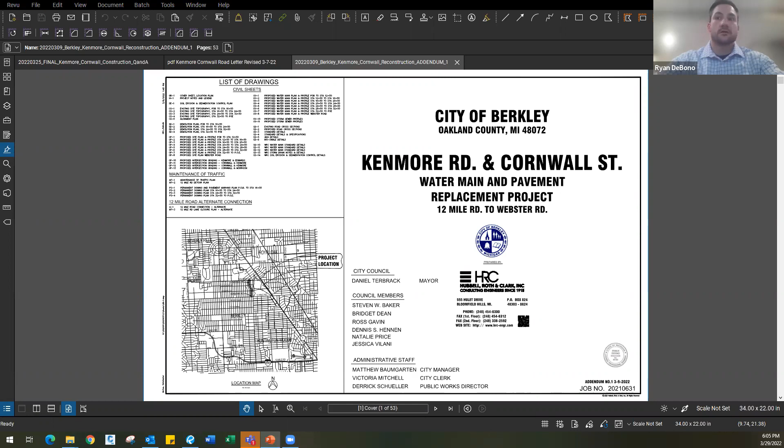Thank you, Tori. If we want to just jump back to that other slide real quick. Yep. I apologize. That's all right. Lost my screen share here. So we see you, Ryan, now. Yep, give me one second. I apologize. That's all right. There we go. Thank you, Ryan.

The first item that will be done is the new water main. We are putting in a new 8-inch water main through the entire route. We're also putting in new drainage structures, all new sidewalks, all new drive approaches, and we are incorporating a green infrastructure component that will help with our combined sewer system.

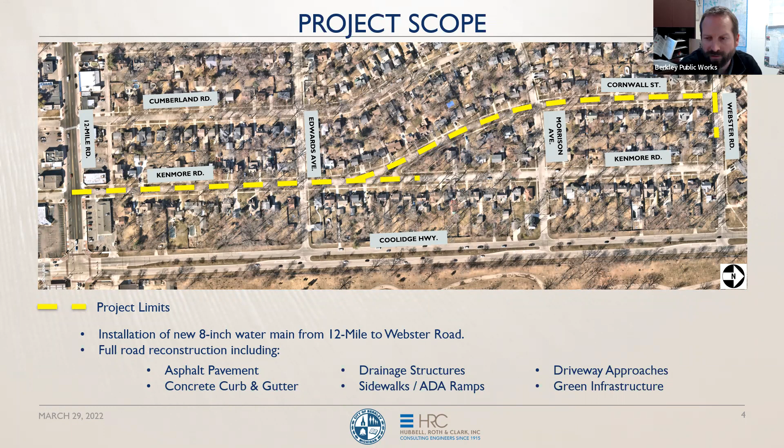So the goals, in looking at this project, we had several goals in mind. As many of you know, the reason that Kenmore and Cornwall was selected is because it rose to the top when we looked at the water main and road surface. When we combine those ratings, this particular section of roadway rose to the top. We've had the most water main breaks here over the last 5 years. So of the 6 areas that went to the top of the list, Kenmore and Cornwall rose to the top because of the number of water main breaks. So that was key for us in determining that this would be where we headed next.

Again, we're upgrading driveways, sidewalks, all the drainage structures. We do have that green infrastructure improvement that we're happy about, the rain garden there at the corner, which will reduce stormwater runoff. Another goal was to increase the amount of pervious surface. Impervious surfaces like pavement obviously lead to more runoff and more water in our combined sewer system. So we wanted to do what we could to create as much green space and preserve the trees as we could. Trees are also responsible for taking in an incredible amount of water, and so that's also important to us.

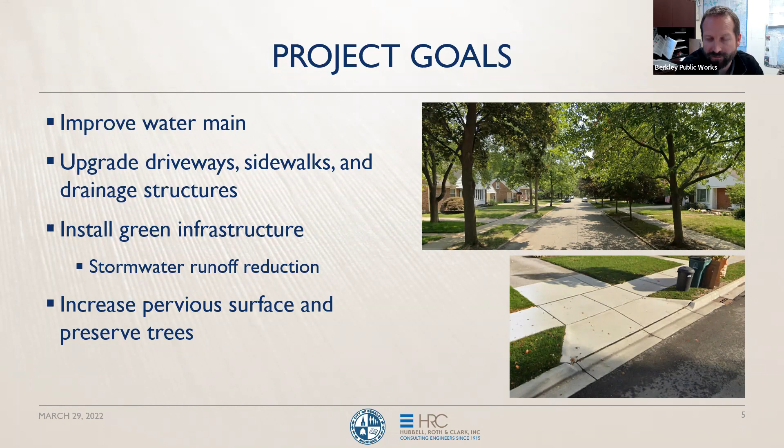Ryan, I think this is my transition to you. Ryan, you're on mute. Man, it's like I'm a rookie on this. You're fine. All right, thanks, Derek.

Again, my name is Ryan DeBono. I was the project engineer on the job. Some of you probably recognize me from the first meeting, so hopefully we're not too repetitive, but it's a lot of the same information. We're presenting it in a little different way here.

So as Derek mentioned, the main purpose of the project is replacement of a 6-inch water main that runs all the way from 12 Mile to Webster Road. We will be replacing that with a new 8-inch water main, all ductile iron. And with that comes all new service lines to every house, running from the main in the road to the stop box at the right-of-way line. We will also be replacing any lead service lines encountered, from the road all the way to the resident's water meter. So if anybody's aware of a lead service line in their house, please let the city know so we can make sure it's accounted for when we start construction. The full replacement of the lead line is paid for by the city, so there would be no responsibilities to the residents in that case.

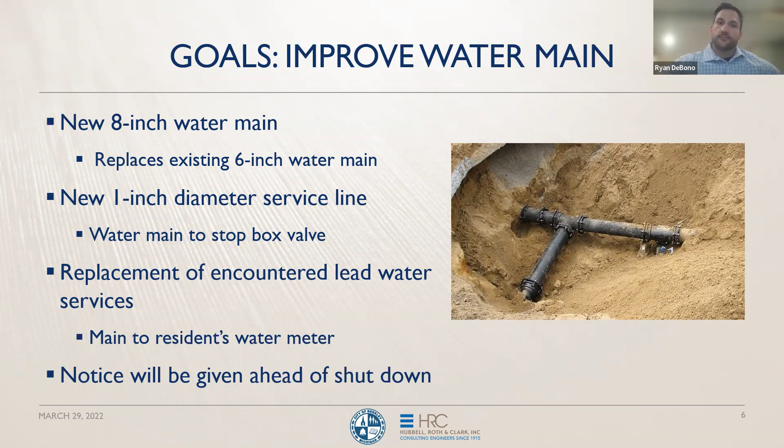So with new water main also comes new driveways, sidewalks, roadway and drainage structures. As part of the project, essentially from sidewalk to sidewalk across the road will all be replaced with new asphalt, new concrete drive approaches, 6 inches of concrete, all new sidewalk and ADA ramps. Again, it's a very intrusive process, but we mitigate the best we can. We give plenty of notice for when your driveways will be replaced, because when the new concrete's poured, we typically like to give 7 days for it to fully cure before we give access to it again. So we'll work with the city in providing temporary parking passes for overnight on adjacent streets and down out of the construction zone on Kenmore and Cornwall.

We'll also be providing new drainage structures along the whole route. We're adding a few more than what's there currently to try to help with some drainage issues that we've discovered, and try to mitigate any sort of ponding in the roadways.

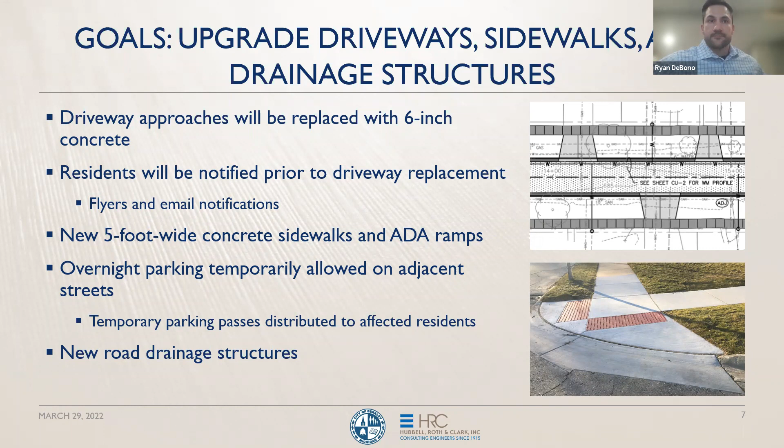So as Derek touched on earlier, at the fork in Kenmore and Cornwall, we are installing some new green infrastructure. It's referred to as a bioswale, so it would be a variety of different plants and flowers that are water-loving plants. This area acts as a small detention area where all the localized runoff flows in, and it's slowly filtered down through the plants, the soil and the planting mixture that we use. It helps alleviate that initial runoff from going directly into the sewer system. It also filters the stormwater, and then it goes into an underdrain located down the center of the bioswale and back out into the sewer system.

All the disturbed lawn areas will be replaced with 4 inches of topsoil and sod. And again, it's the contractor's responsibility to provide the first 14 days of watering, and then it would be transferred to the resident for their section of lawn.

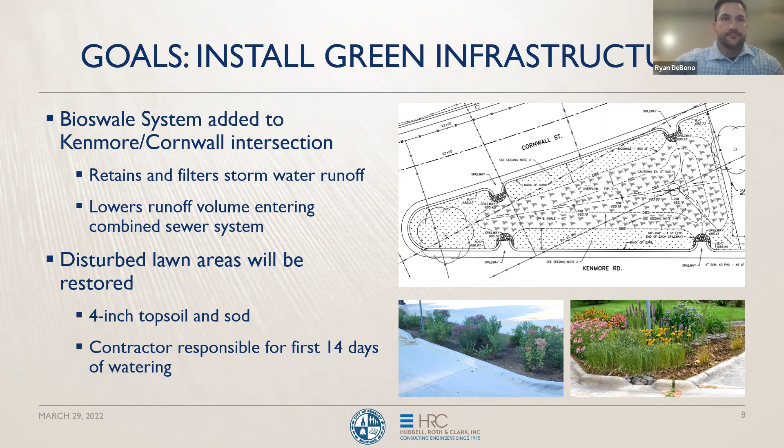So although our total road section is getting a little narrower, we're also providing a full 6-inch curb through the whole project, which isn't there currently. Through the years, there's been overlays on the road, and that takes away from the exposed curb height. So I think the average on this job now is like 3 inches. So when that's all replaced, we'll have a full 6-inch curb height, and we'll have a full curb and gutter

section there to encourage the stormwater to be stored in the gutter temporarily. We want to kind of store the water on the road before overwhelming the sewer system. So that helps decrease the first flush and the initial rush of water down the catch basins and into the sewer system, which will give the system time to drain and reduce the likelihood of any sort of backups in the sewers.

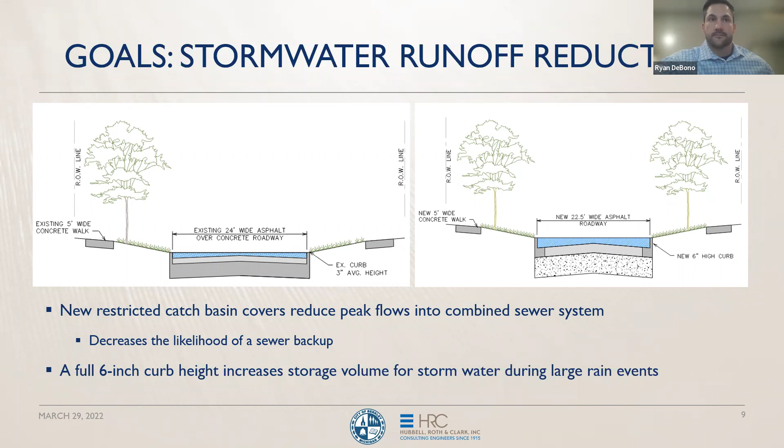Also, one of the main goals of this project, Derek touched on too, is to preserve all the mature trees. And I don't need to run down every single benefit that trees have, but we highlighted a few of them here. We have 90 trees in the project area, and a lot of those are mature tall trees, and we've set up our design to try to preserve any and all of them. And the mature trees obviously will provide a benefit in your cooling costs in the summertime by the shade.

They absorb groundwater, stormwater, and there's a lot of volume of water that's held on the leaves of the trees as well during heavy rain events. So all those benefits help in preventing the stormwater from overwhelming the sewer, and it's all mitigating risk of potential water in basements.

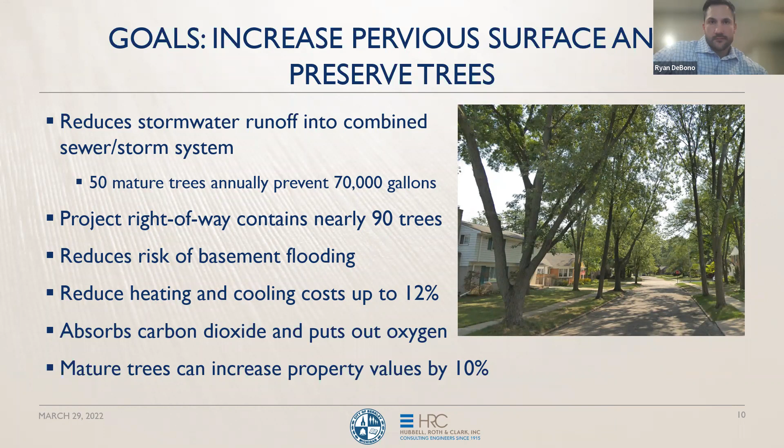And obviously, I've touched on these already, but with more impervious surface such as pavement, sidewalks, driveways, things like that, that gives you less opportunity for infiltration, which means more water gets into the sewer faster, which increases the risk again for potential flooding during very heavy rainstorms, or the first flush of oils and greases on the road that's washed into the rivers and the lakes, which obviously is not the case in this one since it's a combined system, but it's just overall not great for the environment. We want to encourage the stormwater to absorb into the ground and the grass and less in the sewer.

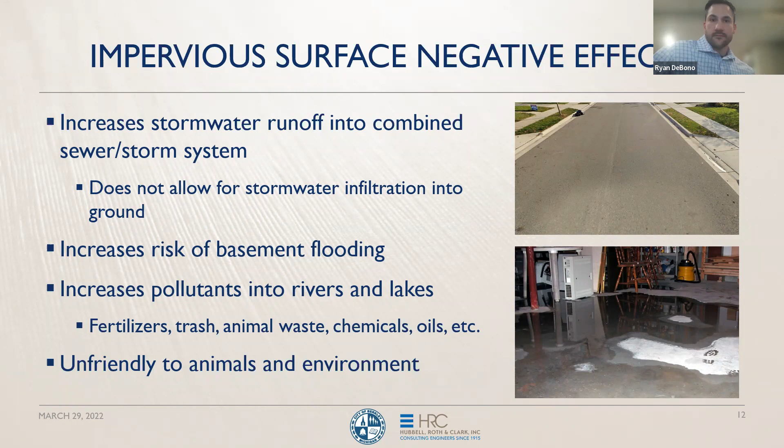So touching on this, the sanitary sewer leads: every resident has a sewer lead that connects to the main out in the street. And this has been on plenty of homeowner notices already. It should be pretty repetitive at this point, but we want to encourage all the residents to have their sewers inspected if they believe that they're not functioning properly. That could be having a licensed plumber come out, and they can videotape the lines. A lot of times there's roots, or sometimes there's breaks or offsetting joints in the pipes, and that could potentially lead to your basement flooding as well.

So residents are strongly encouraged to do that prior to construction, because it's better to fix it now before we put a brand new road in, because that'd be the cheapest time to do it. And we'd also encourage a backwater valve to be placed in the basement as well; that's always an option, to have a second measure of protection against a sewer backup. And again, those have been handed out on the homeowner notices, and we've had several residents that have already had theirs inspected, and there's been some problems discovered. So thank you to everybody who has, and it's better to get that taken care of in the next few weeks before construction begins.

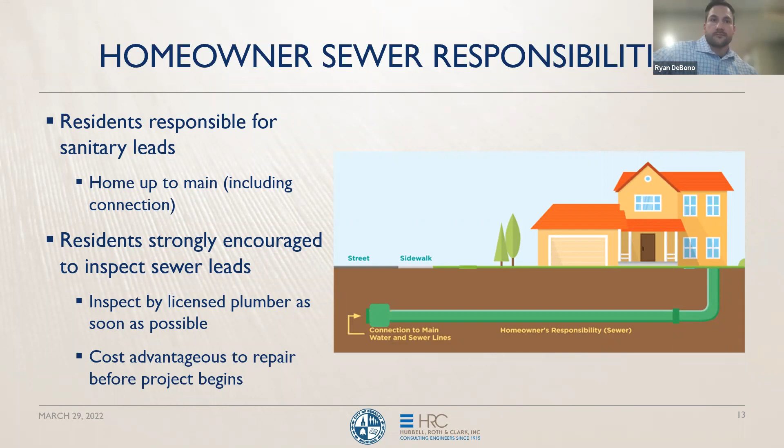Now I'm going to hand it over to Nick Nacita to take over from the project traffic perspective and the public safety, and how we came to our decisions for the parking standards and the fire lanes and all that fun stuff. So take it away, Nick.

Thank you, Ryan. Good evening, everyone. Thank you again for attending the town hall discussion. We really appreciate your interest in the project. My name is Nick Nacita. I work for Hubbell, Roth & Clark, and we've been working with the city and public safety as a collaborative effort to mitigate some of the conflicts that public safety is facing on navigating through the city.

Some of the project considerations here: multiple things were considered when designing for the reconstruction of Kenmore and Cornwall. My portion focuses on the public safety aspect of it. And then Ryan will further discuss saving the trees and some of the concerns with the driveway, so he's going to show that there is adequate driveway access. And then some of our findings from roads with similar operations we're excited to share with you, and also examine some of the existing conditions and focus on if we were not to do anything at all. Next slide.

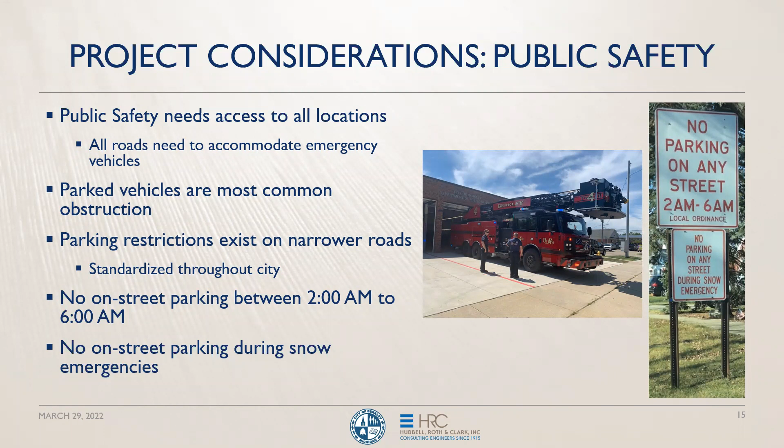So the two main variables that we were considering to mitigate some of the obstructions that public safety faces on the roadway: we looked at the existing roadway widths and also the vehicle widths that need to access these roads. So we reviewed the entire network and we found that the roads pretty much range between 22 feet to 28 feet. One common term that you're going to hear tonight is clear roadway width. So I just wanted to break down what that term means. That's basically the measurement from the face of curb to the face of curb. So you can see from that picture at the bottom, that is taking the measurement from just right inside the face of that curb all the way across the street to the other side of the curb.

So we're looking at that distance just because typically when you park your vehicle, on the passenger side, so the right side of the vehicle, you pretty much hug the face of that curb, unless maybe you have a teenager at home and maybe they park on the curb or on the grass. But generally speaking, for on-street parking, your passenger side is right up against that face of curb. And so we're trying to measure that distance to consider how many vehicles can be parked on the street and still allow for an emergency vehicle to pass.

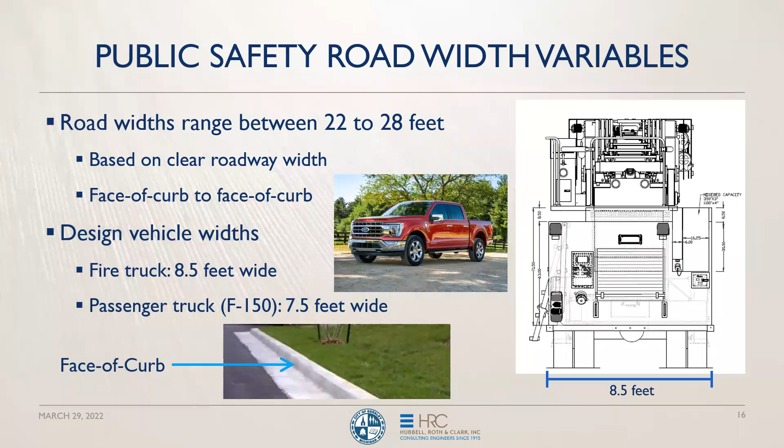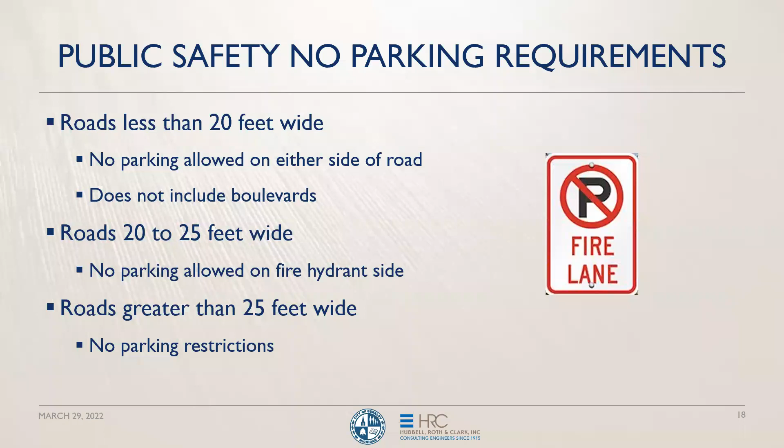And then with that, again, thank you everyone for your time. Hopefully that clarified some of the no parking concerns that we were hearing from the residents from the previous town hall meeting. And we'll be around after the presentation for some Q&A to answer any other questions or concerns that you may have. And with that, I will transition it back to Ryan to further discuss some of the other considerations that we had when designing for the reconstruction.

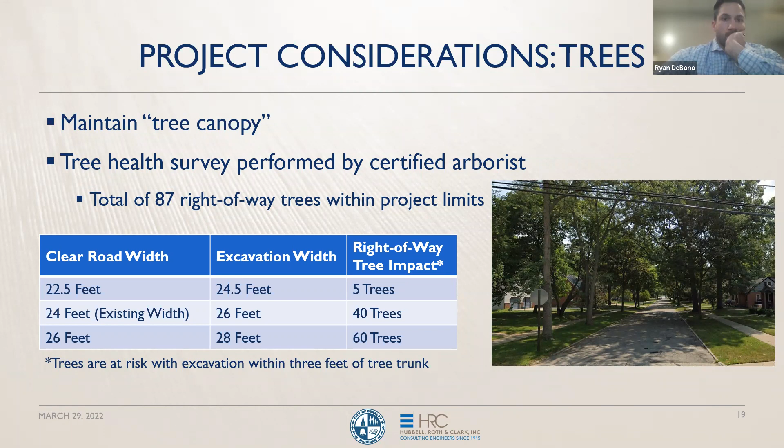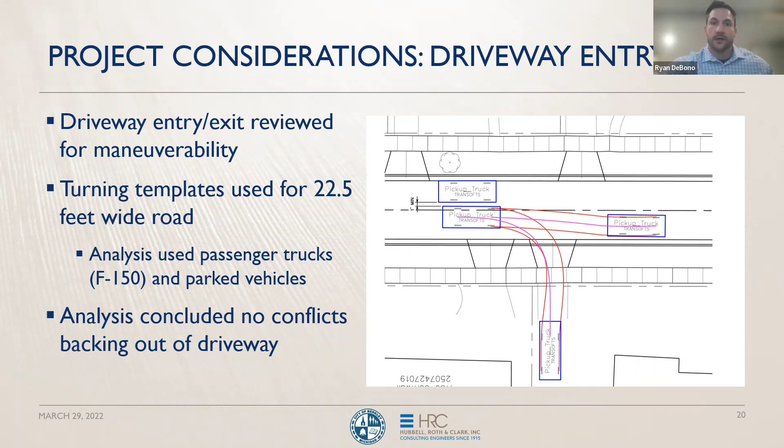So that video you just saw, that was on Princeton, and throughout the city, there's plenty of roads that are less than 25 feet wide. Some examples are Earlmont, Princeton, like you just saw in the video, and Wiltshire. And so if anyone wanted to get a feel for what that width feels like, feel free to drive the roads. There's already roads out there that don't allow parking on one side due to this width. And there hasn't been any issues due to leaf pickup, garbage pickup, or any other functionality.

And again, as Nick mentioned in the earlier slides, everything resets at night anyway due to the no parking ordinance overnight. And for most of the parking, there's a lot of larger driveways, a lot of garages, and that mitigates most of the need for on-street parking outside of, again, holidays and bigger events of that nature.

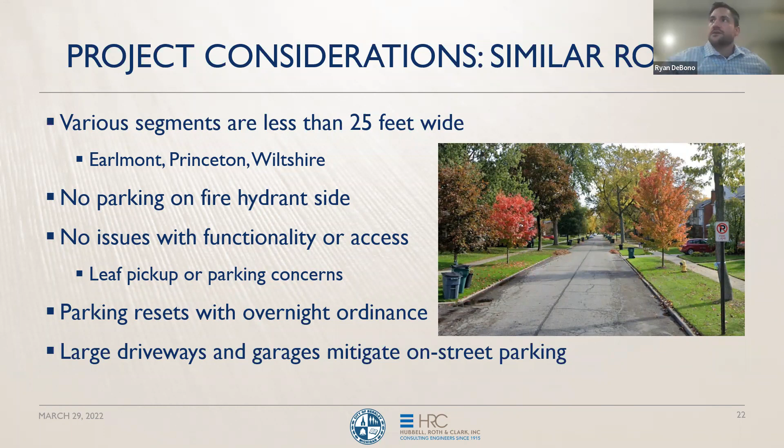So I guess one of the considerations too in this project is if we do nothing to the road. Currently the road is on the top of the list as one of the worst pavement conditions in the city. And it's also along with the watermain breaks, which is the highest number in the last 5 years. And that's why this project rose to the top of the list.

Now, the current road width is 24 feet, face of curb to face of curb, so 24-foot clear roadway width, which would mean when the city implements the parking ordinance, which would be, I imagine, this year, Nick's going to touch on that later, I believe, there's going to be one-sided parking regardless of the road condition and the watermain condition. So again, this segment will continue to be the top priority for the city, but I guess this is the worst case scenario.

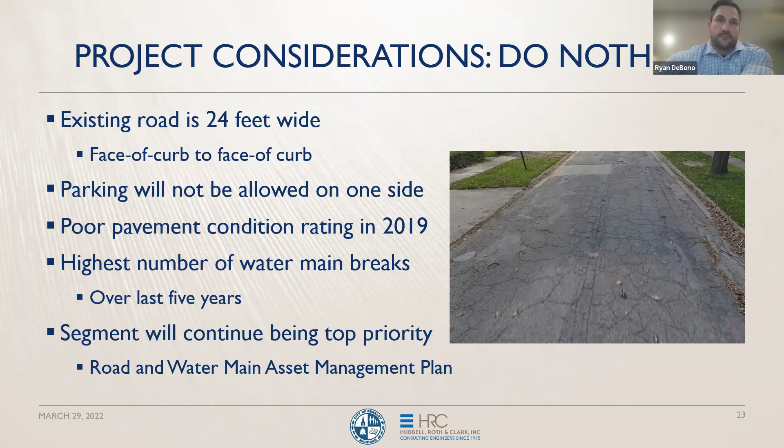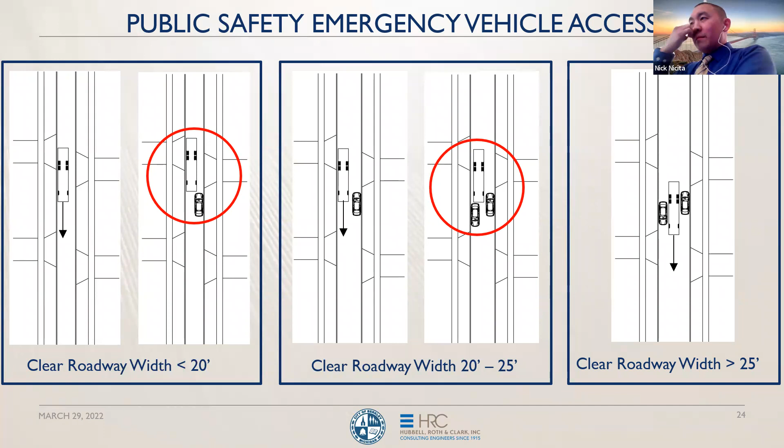And again, just to reiterate here, this is the slide with the clear roadway width between 20 and 25 feet and the impacts that would have if an emergency vehicle had to make the rounds down the street and there was parking on both sides, it wouldn't quite make it.

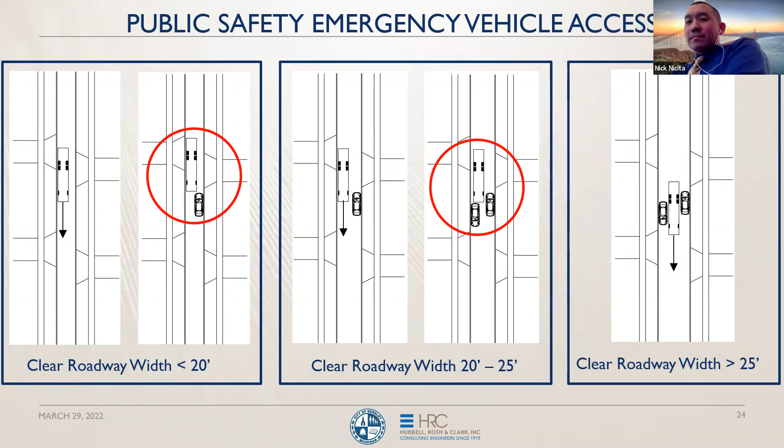And if I may, Ryan, real quick, like you said, the takeaway from the previous slide is if we do nothing, Kenmore currently falls in that middle bracket with the clear roadway width being 20 to 25 feet. So with it being 24 feet, without doing any reconstruction, later this year when the no parking ordinances do go into effect, there will be no parking on Kenmore on the fire hydrant side due to this new ordinance that will be implemented later this year. Thank you, Nick.

So quick overview here. I'll try to get through these next few slides pretty quickly to save some time for some questions. So the project that's currently been bid is to reconstruct the road at a total clear width of 22.5 feet. So that is 23.5 foot back of curb to back of curb, which if everybody remembers, the original design was 21 foot back of curb to back of curb. So we've increased the clear roadway width by 2.5 feet from the previous design.

The city is listening to all the concerns, and we were able to get 2.5 additional feet without posing any serious impacts to the trees. Now, some care is going to have to be taken during construction, but that was kind of a step in the right direction of a compromise.

And again, this also preserves the trees, which is a good balance of saving the environmental needs and the benefits that the trees provide, as well as keeping the public safety in the forefront and making sure that there's adequate fire lanes and emergency vehicle lanes. And again, this provides safe width for driveway entry and exits, and maintains the benefits of the trees.

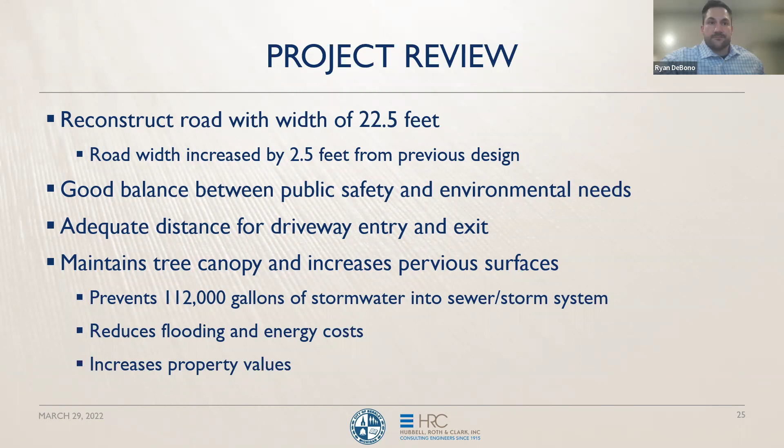So the overall schedule for the project, we received bids last Tuesday, the 22nd. So the contract will be awarded in April, with anticipated start of construction this spring. And if everything goes to plan, the project should wrap up in the late fall of this year.

And again, the signing report that Nick mentioned, the city ordinance, the report itself will be completed in the fall of this year, with implementation by the city to shortly follow. So that would be when the ordinance of the fire lane parking, no parking on one side of the road, would begin to take effect.

Yep, and again, that was just a collaborative effort between us at HRC, the city, and public safety for trying to standardize the no parking throughout the city. If I could clarify too, that won't be an ordinance, that'll be by traffic control orders. Yep. Thanks, Matt. Thanks, Chief.